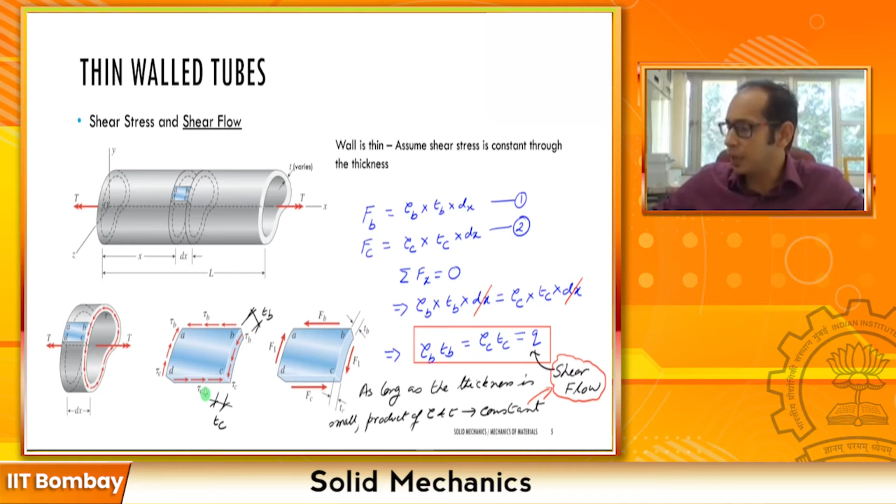Now that we have the concept of the shear flow and we are beginning to understand how these shear stresses vary when you're looking at thin wall tubes, let's go ahead and try to derive the torsion formula for the thin wall tubes. So what we are looking at here in this figure is a thin wall tube with a particular thickness t. This t can be varied, but for this one we simplify it as t, and you will see the eventual torsion formula that we derive for thin wall tubes boils down to a more simplified version.

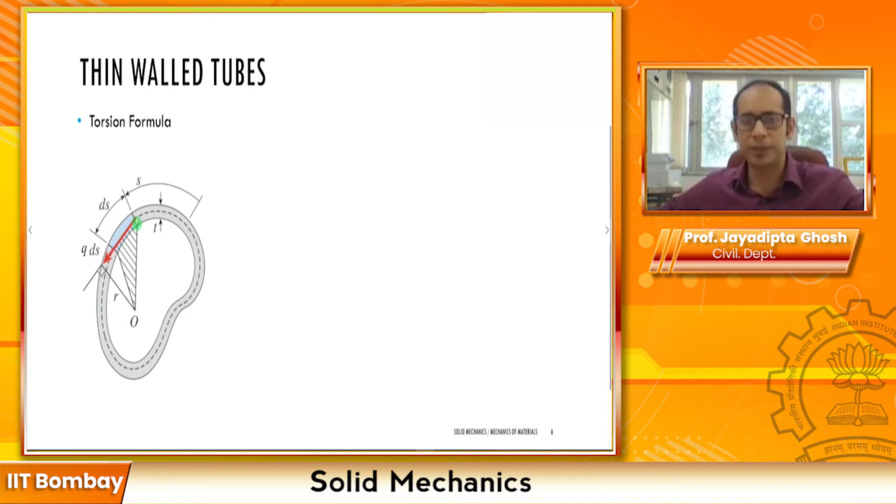Okay. So now the question is, how do I relate the shear stress tau with the torque T applied to the section? Similar to how we derived the torsion formula for the solid circular shaft, we took a small area dA, we wrote what is the torque about the centroid point, and then we integrated that to find the entire torque.

So here, for this particular section, this dotted line that you see over here is the median line, which runs through the center across this entire cross section. So let's just mark that one. So this is the median line. Okay, so let's start writing the basic expression for the moment for a small element.

So if I take along the median line a small element of length ds and a particular thickness, then what I can write about the moment about this centroid O is my dT due to that small element, which carries, not a torque, a shear stress of tau. So suppose this element ds over here carries a shear stress of tau.

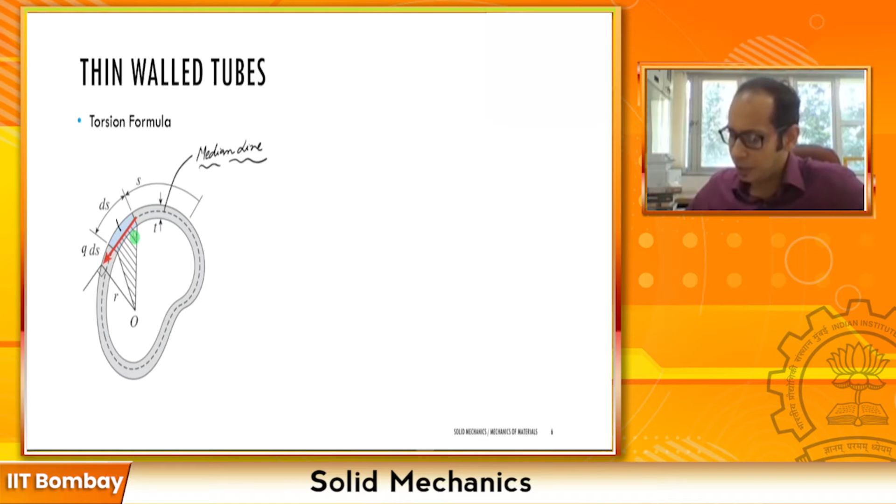In that case, the incremental torque dT due to the shear in this small element of length ds and thickness t is going to be: first I have to find the force, then I have to multiply with the distance. So the force is going to be tau times the thickness t times the length ds, times the perpendicular distance r.

Now from here I can go a step further. Tau times t, the product of the shear stress and the thickness, is equal to the shear flow q. So dT is going to be q times r ds for the small length ds. Now if I have to find the total torque, I have to integrate over this entire median line. This ds was a small segment of the median line, so I have to integrate over that entire length.

So this tells me that T is going to be the integral of q r ds from 0 to Lm, where Lm is the length of the median line. Okay. Since q, the product of the shear stress and the thickness, is the same throughout, I can pull q out: T equals q times the integral from 0 to Lm of r ds.

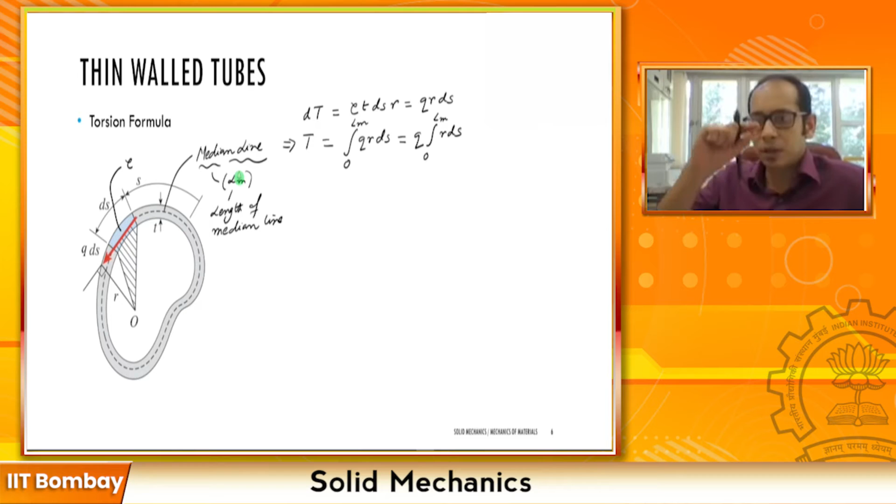Now it is difficult to calculate this integral. How do we calculate it? This integral encircles the entire median line and calculates the product of r and ds, and r is changing at every point. So how do we calculate this integral of r ds? Well, there is a simplified way, a geometric interpretation that we can use to calculate this integral.

I want you to focus your attention on this shaded triangle over here. Now, looking at this shaded triangle, what can I write? This shaded triangle spans the length ds, its two ends are connected to the centroid O, and it has an altitude of r, which is the distance I used to calculate my incremental torque. So how can I write the area of the shaded triangle?

So let's write. I'm going to call the area of the shaded triangle AS. So the area of the shaded triangle, AS, is going to be half of the base times the altitude, right? We know that's the area of a triangle. It is going to be half times ds times r. So r ds, which is essentially what you have over here, r ds is equal to 2 times AS.

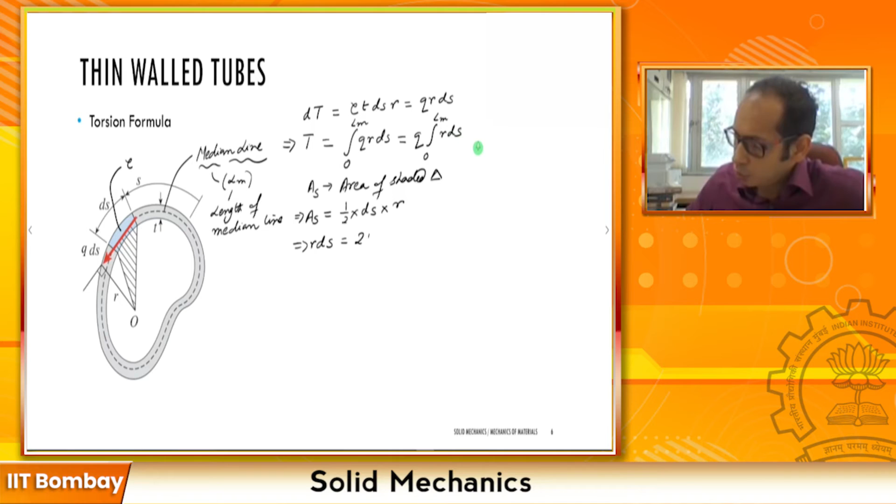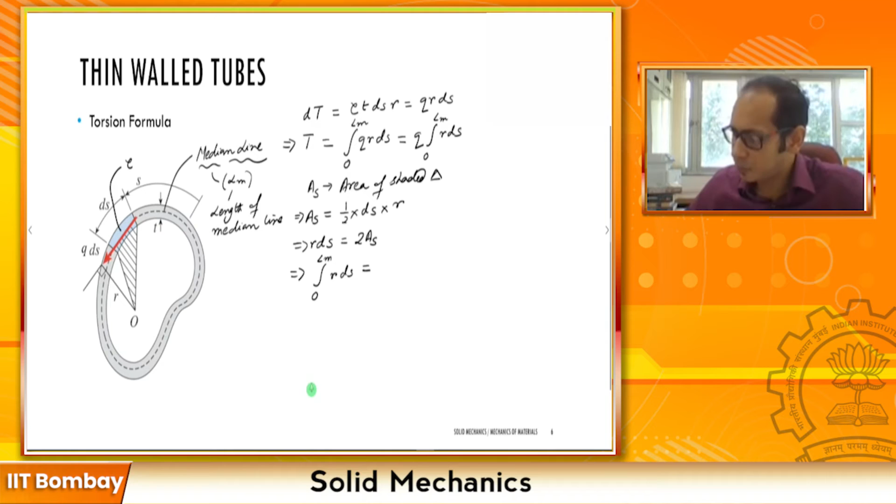Now try to comprehend this. If I take the integral from 0 to Lm of r ds, what does that represent? For this small ds over here, r ds is nothing but 2 times the area of the shaded triangle. Now if I'm traversing across the entire length of the median line, it is simply going to be 2 times the entire area which the median line encloses, this entire area inscribed by the median line. This entire area, right?

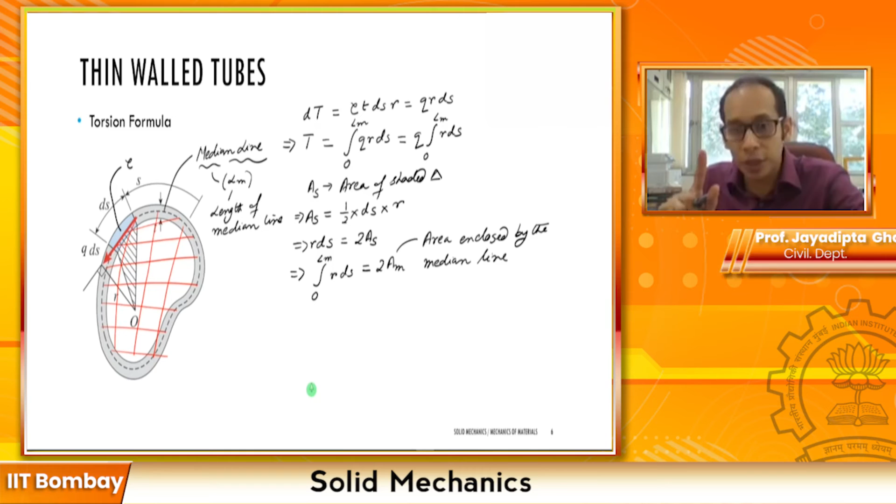So here it is going to be 2 times Am, where Am is the area enclosed by the median line. Now it is a very common mistake, and I want you to make a note of it. This area is not the cross-sectional area of this thin wall that you have. It is just the area enclosed by the median line and not the cross-sectional area. So let's make a big bold note of that.

So this is not the cross-sectional area of the tube. This is just the area which is inscribed. Remember it's a thin hollow tube, so it's not the cross-sectional area of the tube itself, but the area which the median line encloses. So now if I take this expression which I just derived and plug it back into this one, I get that T equals q times 2Am, which gives me q equals T by 2Am, where Am is again the area enclosed by the median line.

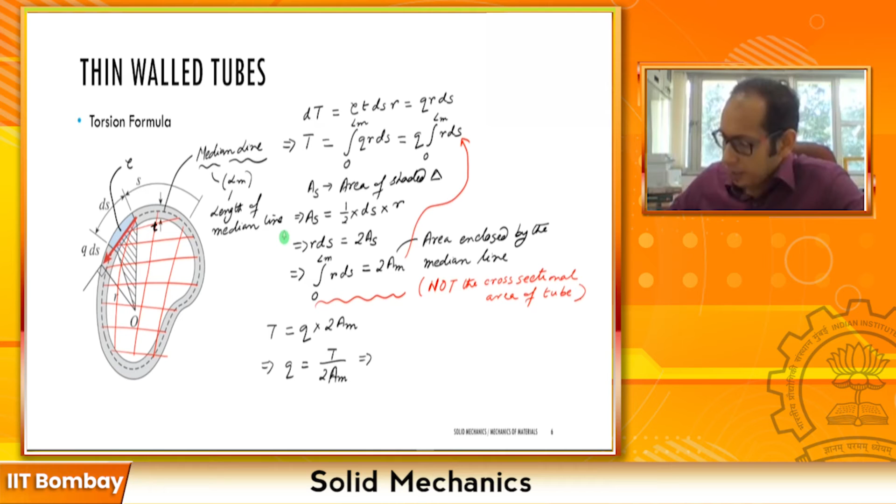If you write it a bit further, and now assume that the thickness t remains the same throughout, you have a thickness t over here at this point, it has disappeared behind my red line, so let me write it again. Suppose this thickness t is the same throughout; this can be simplified into tau times t equals T divided by 2Am. And this can be written as tau, the shear stress, equals the applied torque T divided by twice the thickness times the area of the median line. So this is the torsion formula for thin wall tubes, and remember it hinges on the assumption that your thickness remains the same throughout.

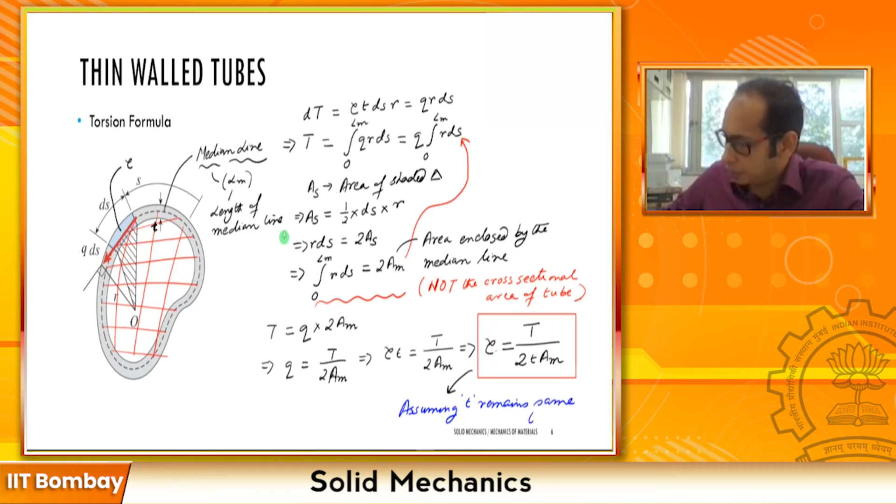So this one is assuming t, the thickness, remains the same throughout. So this is an important concept of what we just learned for thin wall tubes: your shear stress may be different at different points, but the product of the shear stress and the thickness at those points is the same. And if you consider the thickness to be the same throughout, this is how your tau depends on the applied torque. Remember, if the thickness is the same throughout, your tau is also going to be the same throughout, because tau times t is a constant. All right, now moving on.

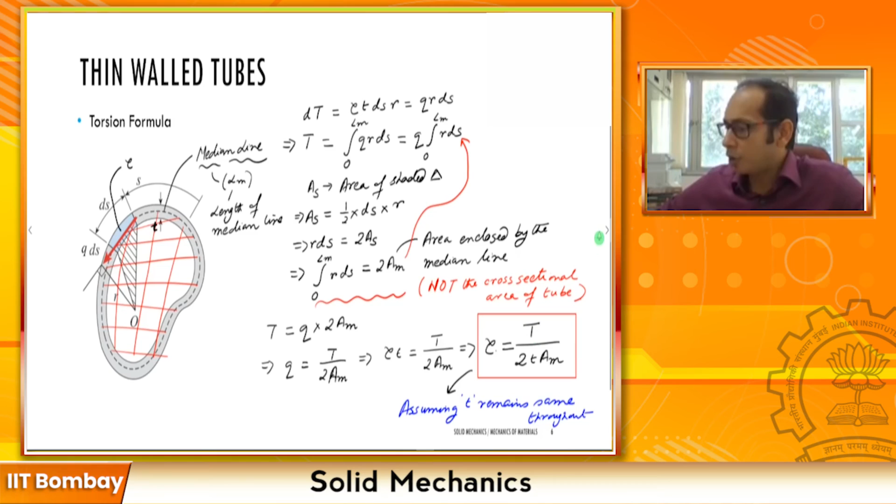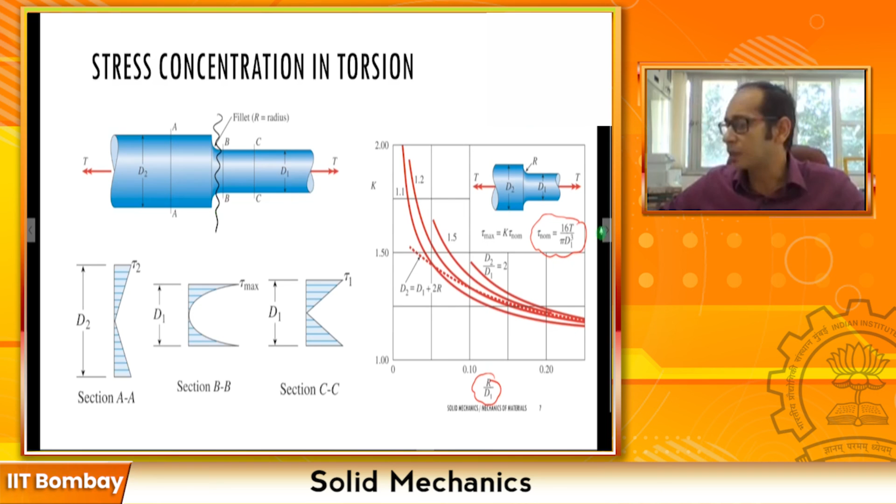Now what I encourage you as a future topic, if you want to read about non-circular sections, the basic textbooks which we refer to do a fair amount of treatise on these ones. But if you are interested, please go ahead and take up some advanced courses in your future, like theory of elasticity or advanced solid mechanics, where you will discuss some of these problems, and you will see how the shear stresses change.

And remember that we had discussed for the rectangular section, you undergo warping, that your section is not perpendicular to the longitudinal axis anymore. And if you have other kinds of sections, for example ellipses, equilateral triangles, or a rectangle, you will see that different points have maximum shear and different points have minimum shear. So I encourage you, if you want to have some fun reading, to go ahead and read on some of these topics.

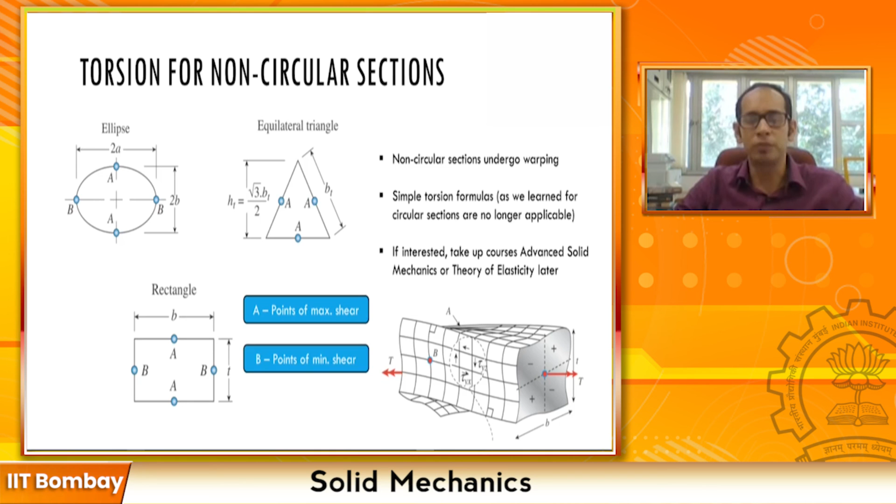So overall, I hope that you enjoyed this topic on torsion, which was quite different than the chapter on axial loading. But in between we looked at analogies, how these seemingly completely different types of loading cause analogically similar deformations, analogically similar angles of twist and so on, right? So I hope overall you enjoyed this topic. In the next chapter we'll move on to a new topic where we'll talk about the shear forces and the bending moments.